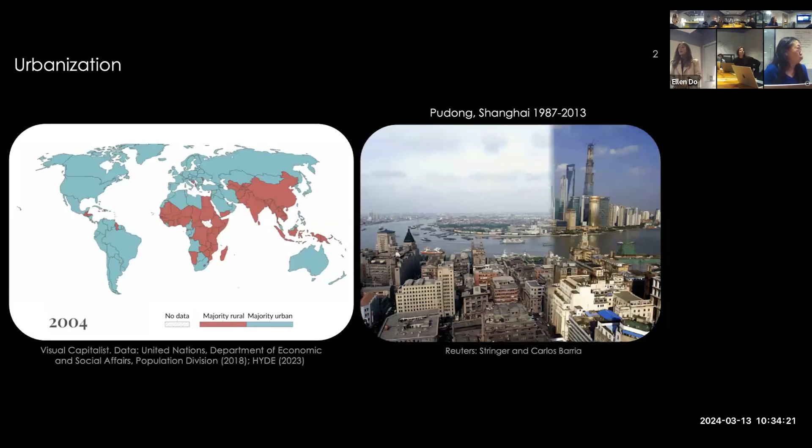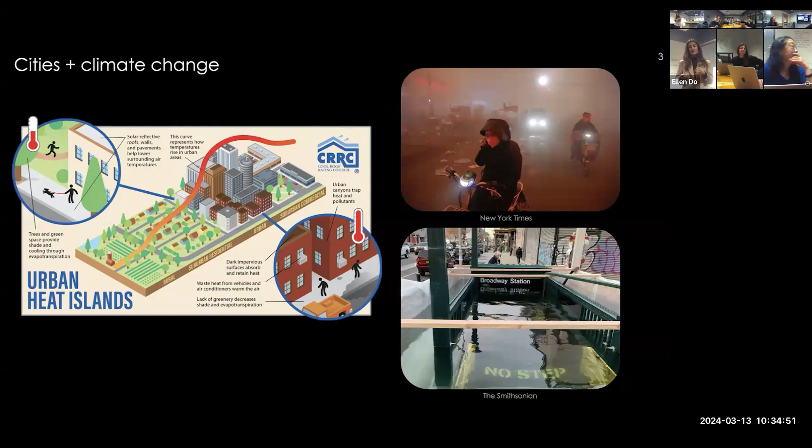This increasing urbanization is happening at the same time that we're feeling a lot of the effects of climate change. Temperatures are rising globally, but this effect is felt even more strongly in cities. This is the urban heat island effect, which is due to things like surface properties and the morphology of cities, which can trap heat and impede ventilation. We're seeing a rise of contaminants in cities now with increasing wildfires, as you're all well aware. Cities are, in general, not very well equipped to handle the impacts of rising extreme weather conditions.

This is because currently our cities are largely comprised of static structures that can't self-regulate. So we need a lot of interventions for things like cooling and heating. In the United States, buildings account for 39% of total energy consumption.

So if we want to think about designing new city spaces and adapting old ones so that they're more resilient to the effects of climate change and urbanization, it would be much better if we could design them to be more self-regulating and lifelike. One great way to do this is to quite literally reintroduce life back into the city in the form of vegetation. Green roofs and walls are a great way to reduce temperatures and improve air quality. However, due to either the integrity of older buildings or the local climate, a lot of spaces in cities are not amenable to this type of vegetative cover.

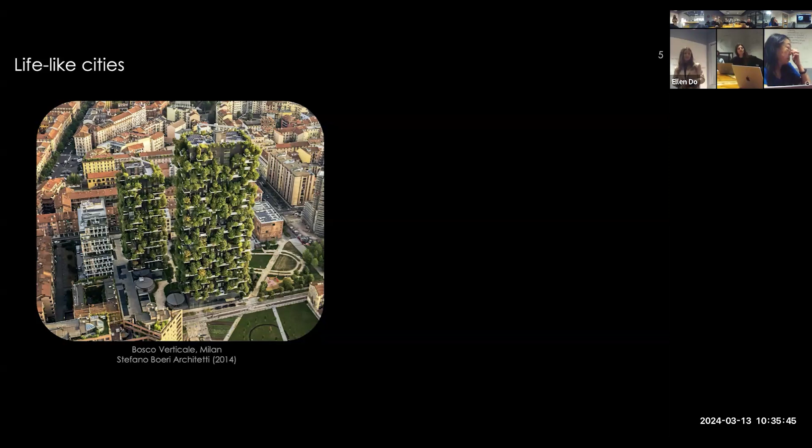So this is where engineered solutions come in, and in particular, adaptive architecture designs. This is a famous adaptive shading facade at the Arab World Institute in Paris. Each of these individual apertures of different sizes can open and close in response to a sunlight stimulus, and it's really effective at reducing the need for cooling intervention in this building. But as you can see here, the mechanism is rigid body motions of slender structures that require a lot of electronic actuation, and there are a lot of moving parts here. This facade was famously frozen in place and then under repair for years.

So if we want to think about building on and maybe improving upon these types of designs, my suggestion would be that we step away from these rigid body motions that require complicated input to move, and instead turn toward shape-shifting structures that are relatively happy to deform in large nonlinear ways.

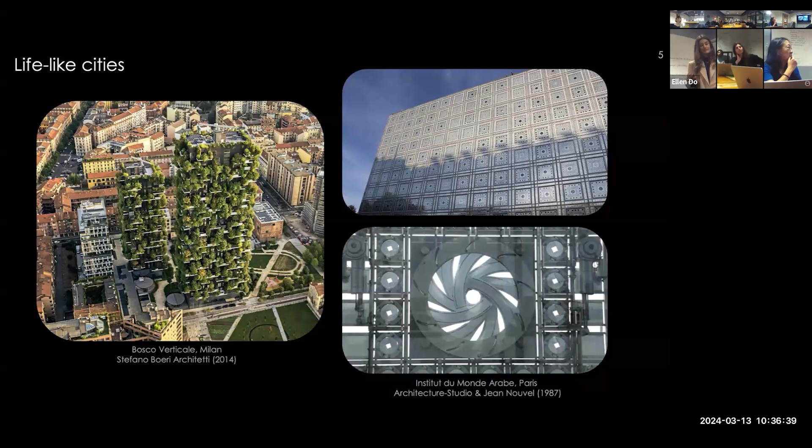So what do I mean by that? Well, when a structure is forced to deform, it will do so in a way that minimizes its total potential energy V, which for elastic bodies consists of the elastic strain energy U and the potential P from external loads.

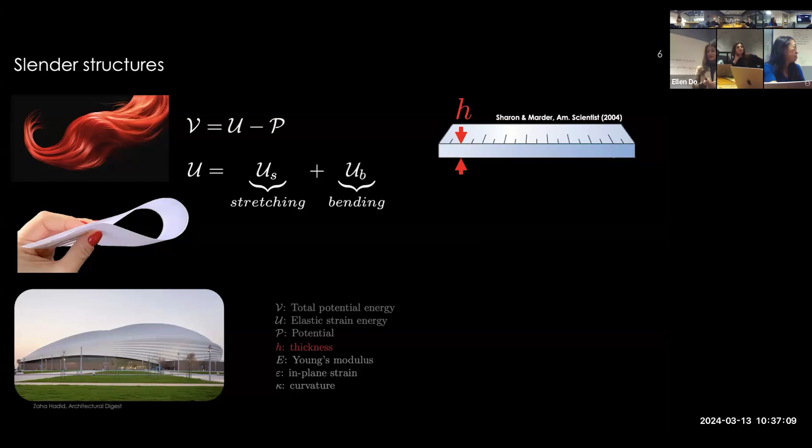For slender structures like rods, plates, and shells, for which the thickness H is much smaller than at least one of the other dimensions, in general we can write the elastic strain energy as a sum of two terms: one that penalizes deformations due to stretching or compression, and one that penalizes bending deformations. The stretching energy scales with the thickness H, whereas the bending energy scales with the thickness cubed. So you can imagine, if this thickness H gets smaller and smaller, it becomes much cheaper energetically to bend than it is to stretch. The result is that slender structures will undergo wildly nonlinear deformations in order to avoid stretching whenever possible.

Sometimes these nonlinear deformations can come on suddenly or even unexpectedly, and this is known as an instability. There are two main types of elastic instabilities.

The first is buckling, and the canonical example is a column under a compressive load. If I start to increase the load on this column, it will reach a critical point where the load path becomes unstable and the structure will deflect in one direction or the other. This is a bifurcation instability.

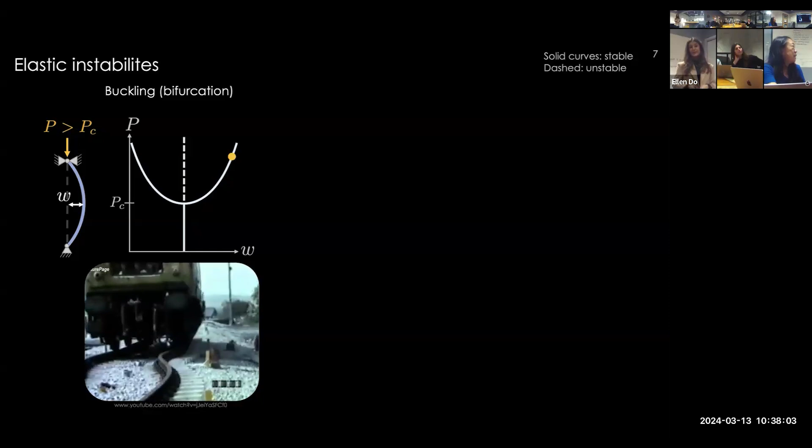An example is railroad tracks, which can swell due to thermal expansion from the sun. This causes a compressive stress to develop, and buckling can occur in kind of catastrophic ways.

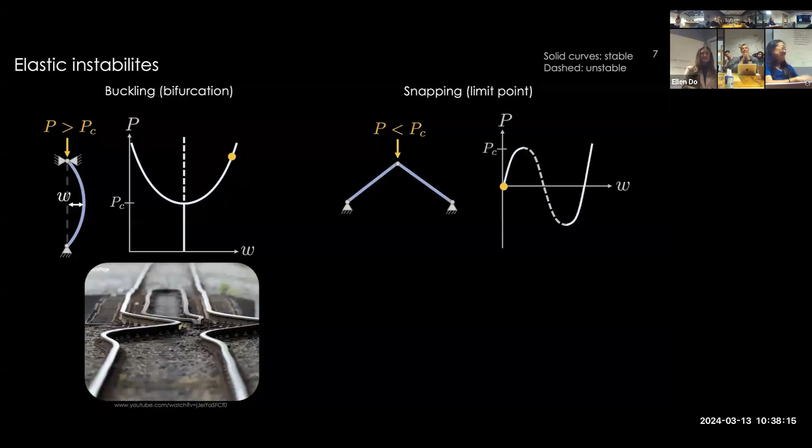Snapping is the other main type of elastic instability, and the example here is of a truss, which is loaded at its center. As I increase the load, it reaches a critical point where the load path is unstable, and the nearest stable point on this load path is quite far away in terms of the deflection W. So the structure will rapidly snap through to its inverted state.

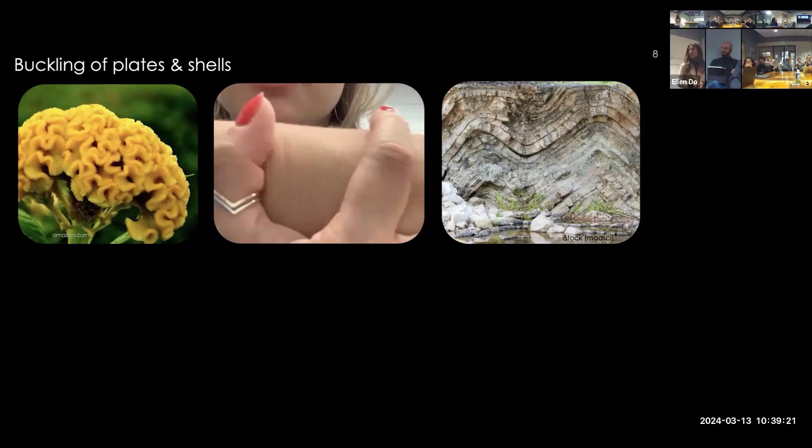Wrinkling is also a buckling instability that emerges due to compression while being confined to a soft substrate. Many of the morphologies in Earth's crust can also initiate from buckling instabilities. Generally speaking, these deformations and instabilities are highly sensitive to geometry, material properties, and boundary conditions.

The point here is that if we as engineers can understand and control these types of instabilities, then we probably have access to a wide range of morphologies for our shape-shifting engineering designs. People have been doing this for the past couple decades, across scales and for different applications, including some of you here.

To give you some examples, at the micro scale, buckling can give functionality to stretchable electronics, and buckling of these spherical micro swimmers is what gives them their mobility.

At the centimeter scale, snap-through instability of this spherical cap actuator in the cartoon here drives this soft robotic gripper.

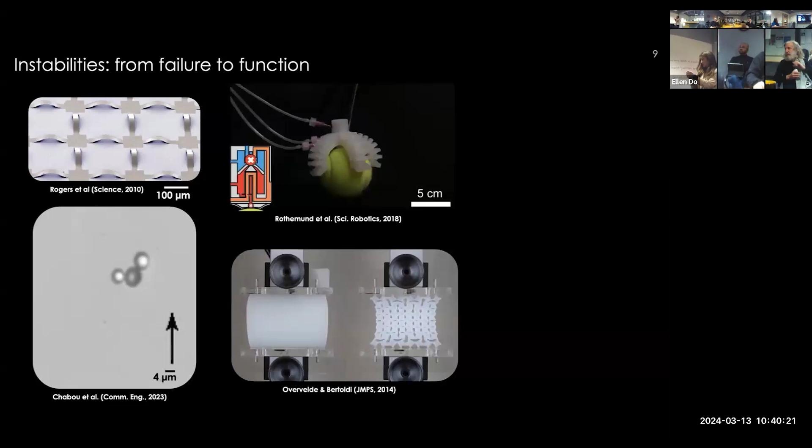A subfield that's blossomed in recent years is that of mechanical metamaterials. The idea is to design the geometry of the structures so that buckling instabilities will give the structure some emergent behavior, such as a negative Poisson's ratio, as you're seeing here.

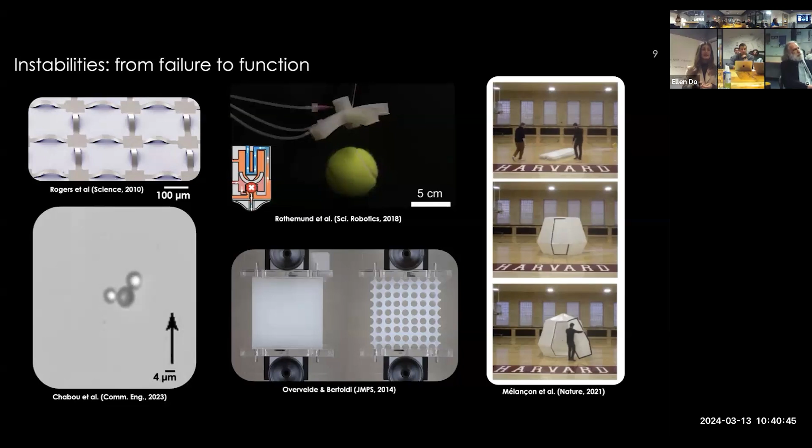Also at the meter scale, local snap-through instabilities aid in the deployment of this origami shelter. I'm showing a notable example here at the meter scale, but really, the vast majority of research on using elastic instabilities in engineering designs has been at the centimeter scale and below. This isn't to say that a lot of these deformations aren't scalable.

There have been some examples in architecture of using these kinds of large deformations and instabilities in designs. In this building facade, large bending of these panels gives the adaptive shading functionality.

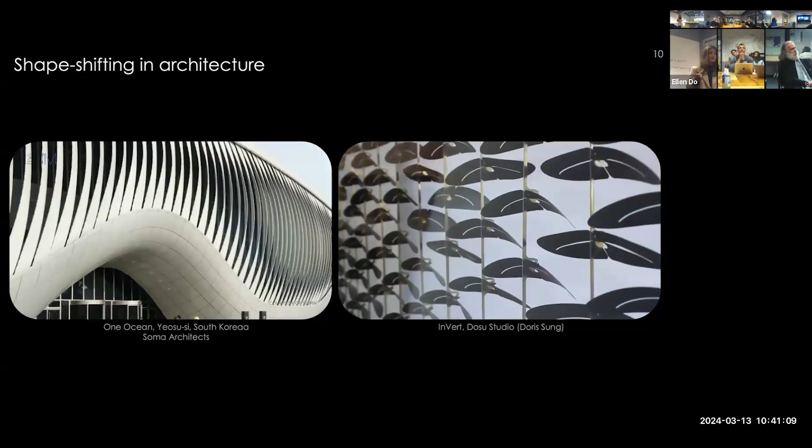In this example, each of these cylindrical shells is made of thermal bimetal. Past a given temperature threshold, they snap through, changing the lighting and thermal environment within this model room.

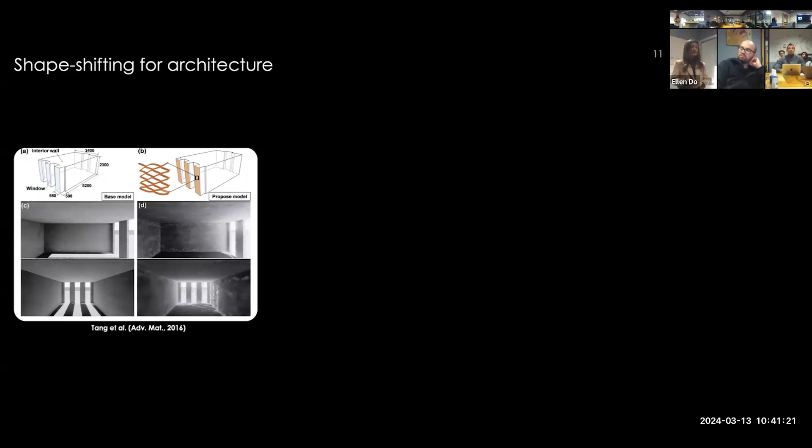The mechanics community is also starting to get on board here. In particular, in the past several years, there have been several examples demonstrating how we might be able to use kirigami for adaptive shading facades.

But ultimately, this subfield is really just getting started. In my opinion, there's a huge amount of untapped potential to connect this wealth of knowledge we have at the centimeter scale about the mechanics of shapeshifting with the need for architectural scale solutions for not only shading, but also things like regulating airflow, sound, water, you name it.

This is the overarching goal of my research, that is to understand and apply the mechanics of shapeshifting, which is to say, compelling structures to adopt a different configuration on demand or in response to a stimulus, to develop adaptive designs for flexible, sustainable, and resilient urban spaces.

My work in this area spans from fundamental questions, like can we understand these deformations, instabilities, and shapeshifting, to more applied architectural applications. I'll bounce between those ingredients in this talk.

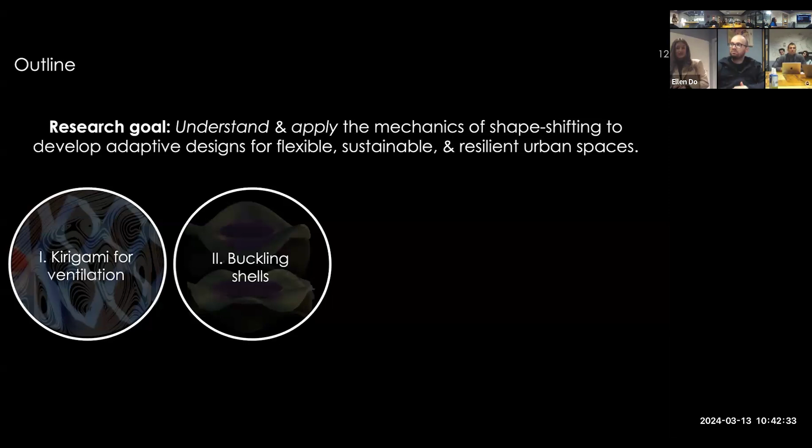I'll talk first about using kirigami for ventilation. Then about a fundamental topic: how shell structures buckle in response to confinement. Then about confined plates at the intersection of art and architecture. Finally, I'll discuss future work on lifelike cities based on shapeshifting and surrounding physics.

I'll start by talking about using kirigami for ventilation. As mentioned in the introduction, cities, because of their morphology, are often prone to poor ventilation patterns, especially in the urban canyon—the space between rows of buildings.

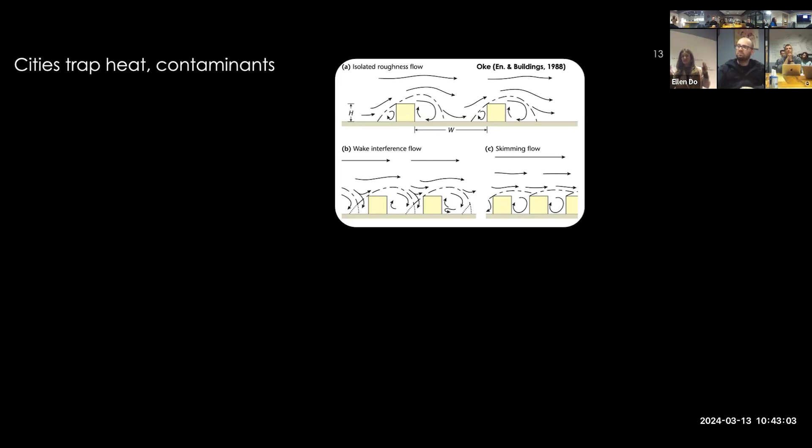Retrofitting structures that pop up within urban canyons, like streeteries, parklets, or canopies over the canyon, common in southern Spain, serve a purpose by providing shelter or shade, but they can also exacerbate ventilation problems.

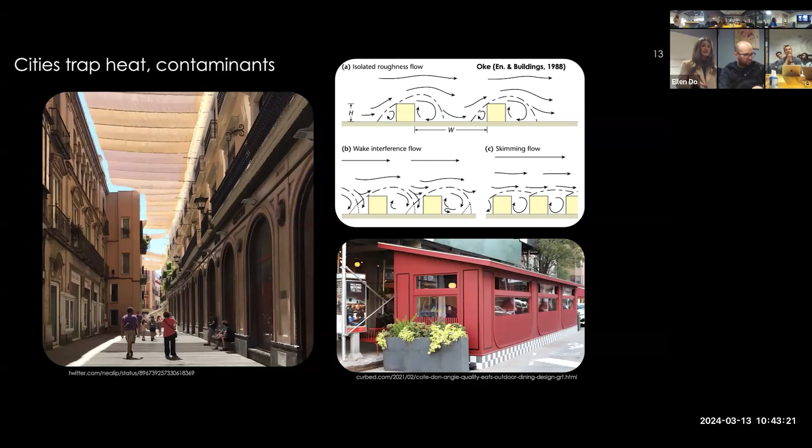Our goal with this work was to redesign these retrofitting structures so they can not only provide shade, but also improve ventilation of a space beyond what it would be in the absence of shade. Our approach is based on kirigami, or cutting paper.

I've added a pattern of linear parallel cuts to this sheet, and when I stretch it uniaxially, the unit cells I've created buckle out of plane and rotate. Our hope is that those angled chutes will steer wind into spaces with stagnant air to ventilate them.

From the perspective of adaptive architecture, kirigami has many potential benefits: it's easy to make and customize, it's waste-free, it's flat-packing, and it can be actuated with uniaxial stretching—a single degree of freedom actuation.

The mechanics of kirigami are very well studied, so I have a library of literature telling me how changing the cut pattern changes the resulting deformations and mechanical behavior of these structures. So for ventilation, my job is really to focus on the fluid mechanics side, where much less is known.

The interaction between kirigami and a fluid is quite complex. But we think the most important feature for ventilation is these angled chutes, so I approximate this as a quasi-2D approximation using angled slats or louvers.

In this study we took this simple geometry to quickly vary it and find design guidelines to inform our kirigami designs. I'll talk briefly about our results with the louver approximation, then bring it back to kirigami and see how we did with these ventilation designs.

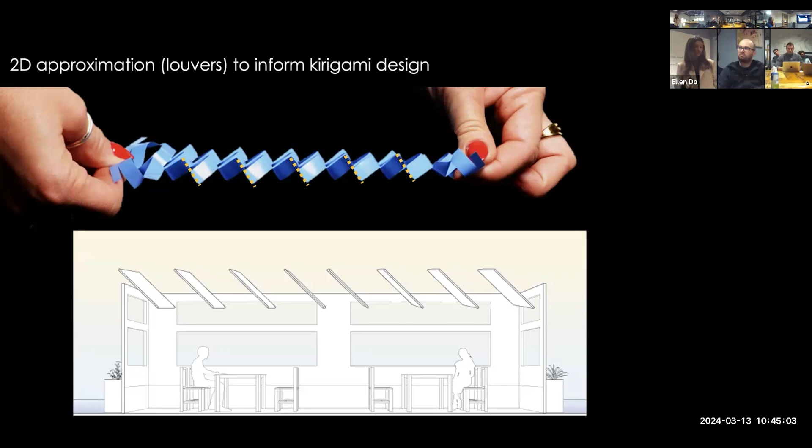I study this primarily with experiments and simulations. We first asked how these angled features interact with oncoming wind to ventilate a standalone enclosed space, shown here as a shallow box.

I perform experiments in a wind tunnel, with oncoming wind ranging from 3.5 to 25 meters per second, corresponding to a Reynolds number on the order of 10^4 or 10^5. This dimensionless number must be kept roughly constant so that what I learn from this scaled-down model applies to realistic urban flows.

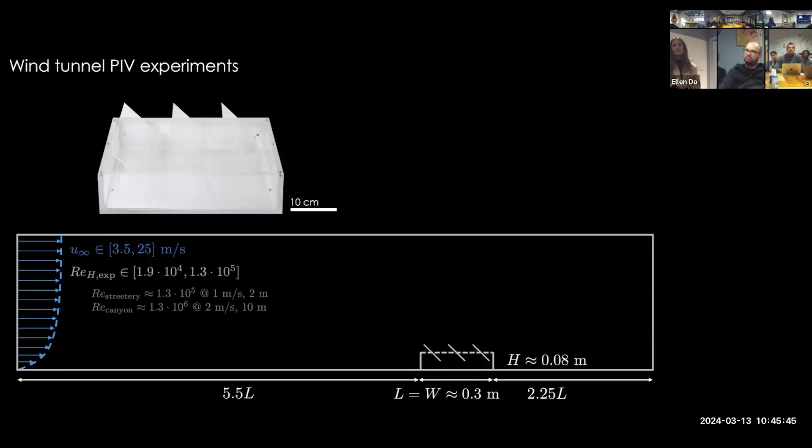This corresponds well to what we'd expect for a typical streetery or parklet, about one order of magnitude below what we'd see in a typical urban canyon.

I perform particle image velocimetry, or PIV, measurements by seeding the flow with aerosolized oil particles, illuminating them with a laser, and taking high-speed images. This gives images of particle motion from which we reconstruct a velocity field. At each camera position, I take 2,000 pairs of images at 25 hertz, totaling 80 seconds of data.

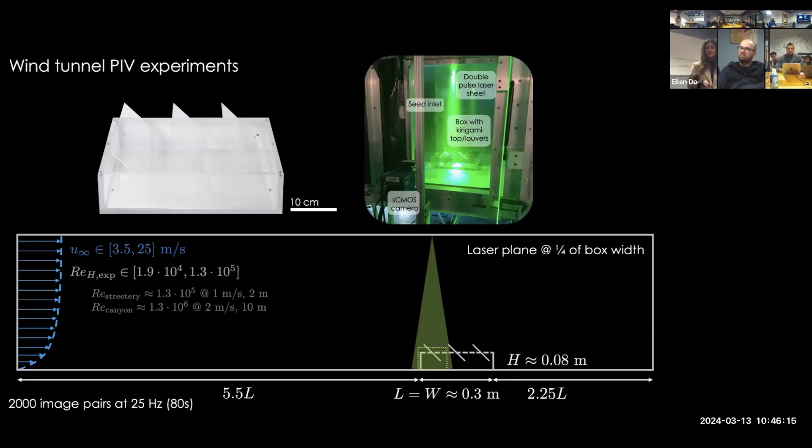And to construct the full plane of this box, I'm taking data at 4 different camera positions. I also did computational fluid dynamics, or large eddy simulations, on this system. Large eddy simulations strike a good balance between resolving turbulence and computational efficiency. I used ANSYS Fluent with standard LES solver settings.

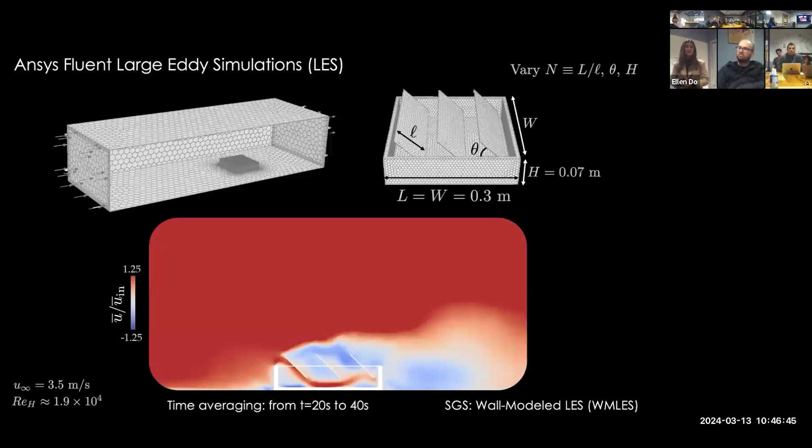The domain mimics that of the wind tunnel, and a typical simulation can look something like this. The time average data from simulations is taken over a course of 20 seconds, starting at t equals 20 seconds.

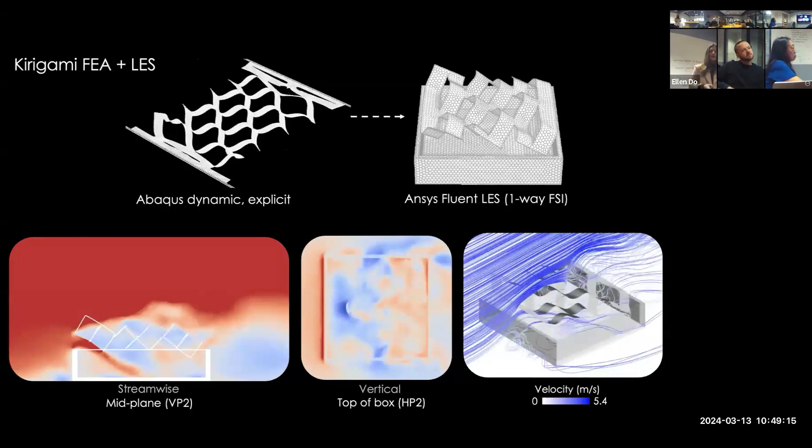I'm treating the kirigami as rigid here, so this is a one-way fluid structure interaction in the simulation. When I do that, we can start to take a look at how kirigami interacts with the flows in different planes, and then we can also look at this time average data here.

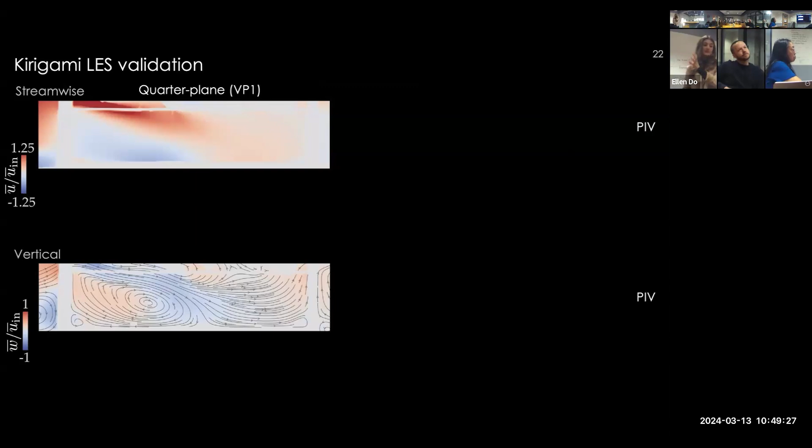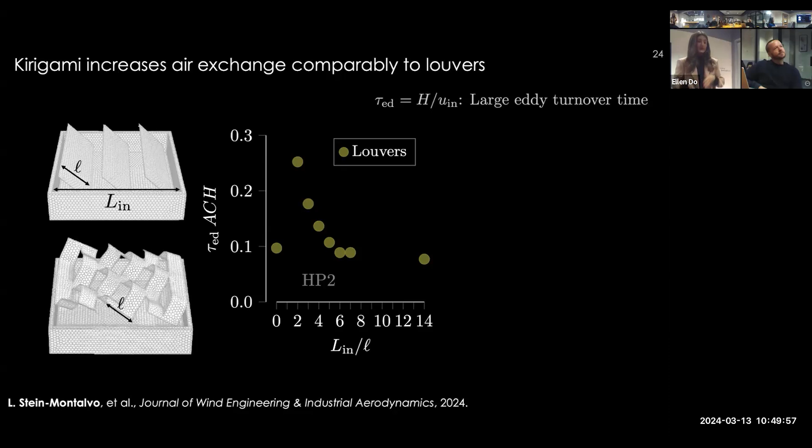So then we can come back and quantify this. This is the same data you've seen for the air exchange rate for louvers; I'm just normalizing the y-axis by essentially the inflow velocity here. Then we can add our kirigami data point, and we see that, first and foremost, we increase the air exchange rate above that for the open box, which was the goal.

We're also seeing that this data point falls really quite in line with the data for this simplified geometry, telling us that this significant geometric simplification was probably a good informative one for this type of design. And there's certainly room for optimization here.

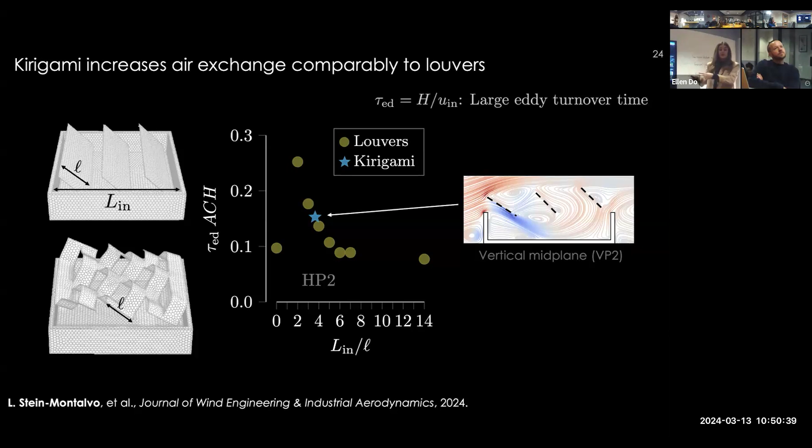One thing that might be kind of unsatisfying so far is that it looks like this most upstream unit cell is really doing most of the work in guiding ventilation. And in this paper, we quantified that in two different ways, and this is the case. So if those downstream units aren't really doing much to help ventilation, we might be able to put them to better use.

Similarly, it might not be shocking to learn that changing the angle of orientation changes the air exchange rate. So for example, if you had uncomfortably high wind speeds, you could close them off to reduce that. And with kirigami, this is certainly tunable in situ with this uniaxial stretching.

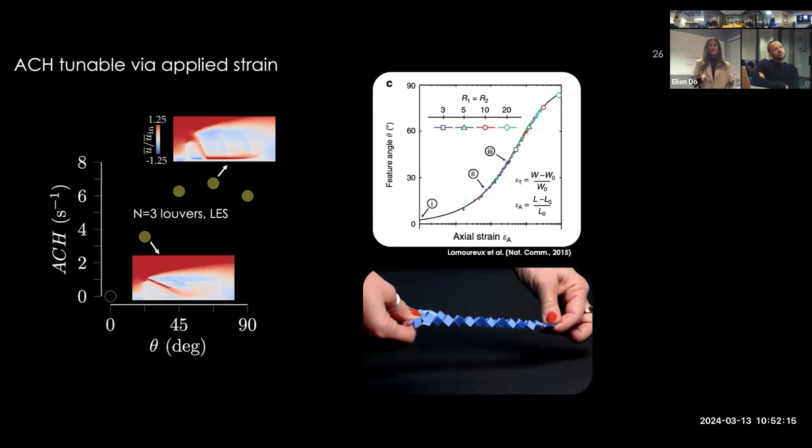This video plays, yeah. Again, this is documented in the literature, how the axial strain, the stretching, compares to the feature angle. So these kinds of actuation ideas are things that I'm thinking about going forward. How can we achieve these things in real structures?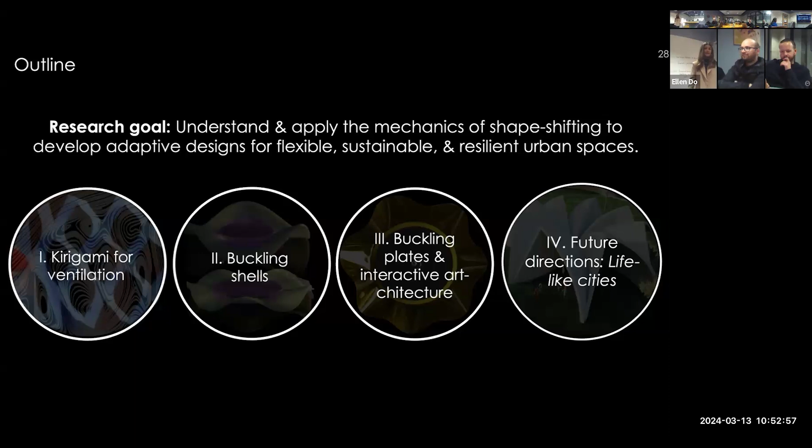So I'm going to shift gears here. But before I do, I want to reemphasize that in this first project, I really focused on the fluid mechanics side of things because the mechanics of shape-shifting of kirigami were very well documented and studied in the literature. But for other kinds of designs that we might want to do with shape-shifting structures, this is not the case, and we need to do a little work to understand the fundamentals. So I'm going to shift gears to talk about one such system.

Shell structures are abundant in nature and oftentimes are confined in some way by their environment. I think that confinement of shell structures will be useful for designing robust adaptive facades, and I'll come back to this when I talk about future work. But at this point, the confinement response of shell structures, which are curved, is not very well understood in the literature, with the exception of specific cases like the indentation response of positively curved shells.

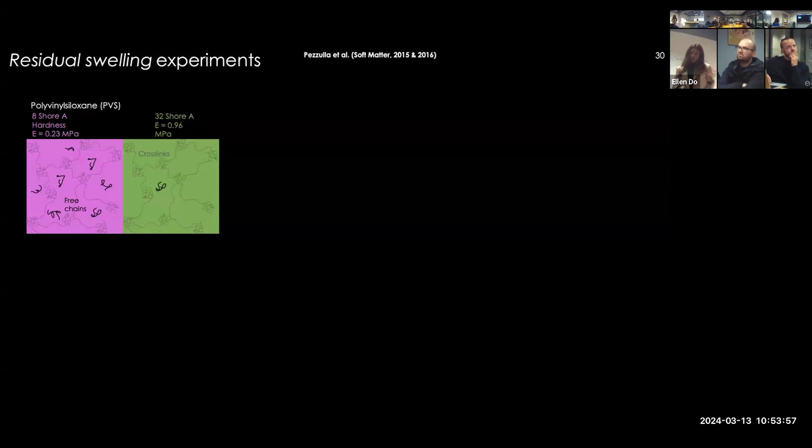So we wanted to take this kind of broad sweeping approach and ask how shell structures that vary in their geometries respond to confinement. To do this, I use primarily experiments, and I used a technique called residual swelling.

So we take these two polymers, which have different hardness ratings and different concentrations of free chains. I cure them one by one in contact with one another. And when I do so, there's this concentration gradient of free chains. So in a diffusive-like process, those excess free chains will migrate from the pink polymer into the green one. That causes a loss of mass to the pink polymer and an increase of mass to the green one. This leads to a geometric incompatibility, which causes these structures to develop a natural curvature.

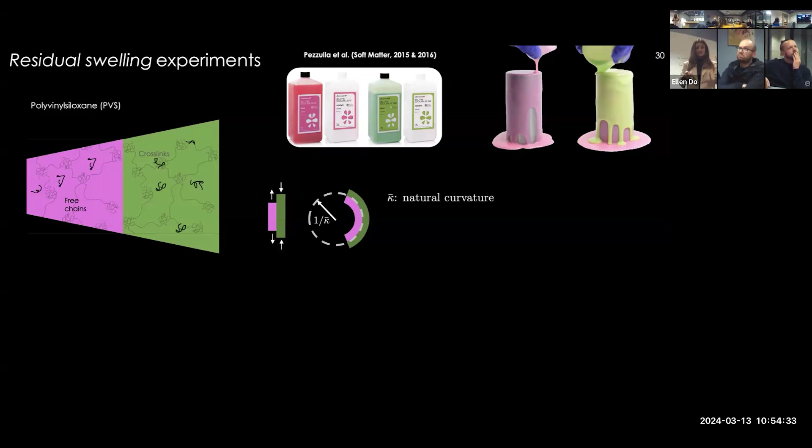I can arrange the different polymers and molds in different ways to create a variety of shells. I studied four types of shell geometries: saddles, rolled sheets, cylinders, and spherical segments. In this initial unconfined state, each of these structures has two lobes.

What I'm going to do is add confinement. I clamp the top two shells in their central region between two acrylic plates, and on the bottom, I'm clamping them at their base. When I do that, we see buckling into an additional higher mode number.

I'll define a few geometric parameters here. The overall radius of the shell is big R, and the free length—the distance from the clamp to the edge of the shell—is little r, which for saddles and sheets is that distance you're seeing, and for cylinders and spheres is essentially the height.

Now, if I progressively decrease this free length r, what we see is buckling into higher and higher mode numbers. I have these shells that vary widely in their average Gaussian and mean curvatures. The geometries are very different, but we're seeing this global behavior among all of them that's really quite similar.

So we wanted to understand what's underlying that. Can we reduce it to its simple physics and geometry?

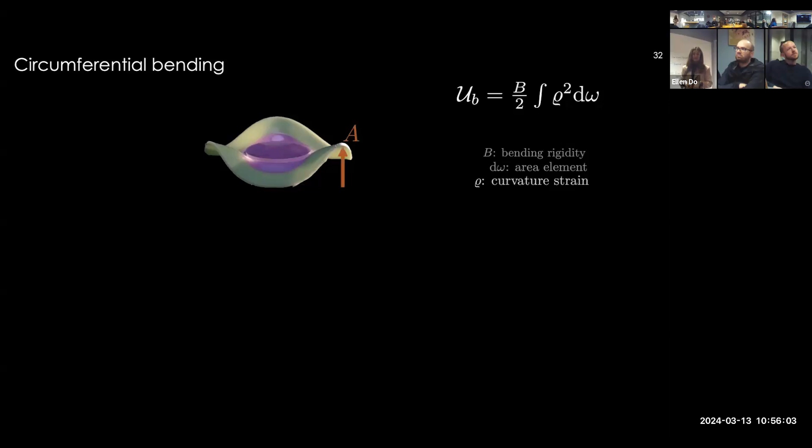To do that, we can come back to this elastic energy, which all of these structures are trying to minimize. We can say that one main contribution is definitely going to be bending in the circumferential direction. I can approximate the curvature in the circumferential direction as shown.

If I just unwrap the edge of this shell, this is what it looks like. To compute a bending strain, I need to compare that to its reference state, which looks like this. Then I can plug this into the elastic energy using some geometric identities, and write an expression for the elastic energy from bending in the circumferential direction.

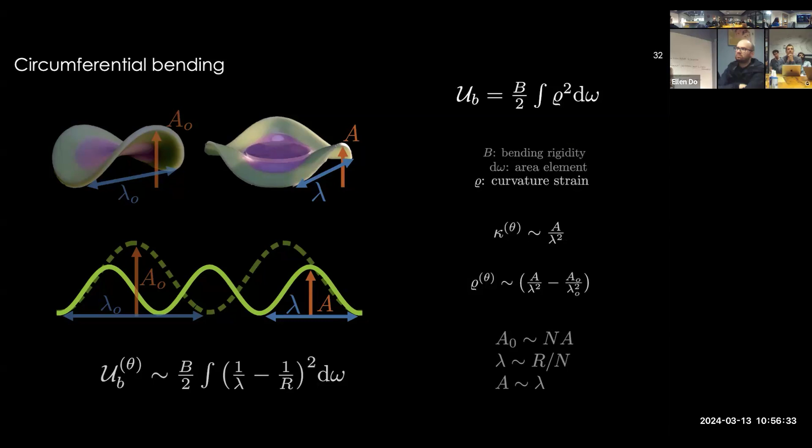The takeaway here is that from the perspective of the circumferential direction bending energy, it wants to preserve these long wavelengths, which means it wants a low mode number. Something's clearly opposing that because we're seeing higher mode numbers.

What we think that is, is bending in the radial direction. I can do a similar thing here—it's loading again, but I'll write an expression for the curvature in the radial direction and compare that to the reference state, and plug this into a radial direction bending energy term.

The takeaway here is that from the perspective of the radial direction bending energy, the structure wants to preserve this ratio. So if this free length r gets smaller, it wants a lower amplitude, which means it wants a higher mode number. So we think these are the two competing ingredients here.

So I can carry out an energy balance, which means I'm going to equate these terms, equivalent to minimizing this elastic energy. When I do, I come up with a scaling for how the mode number should depend on this geometric parameter, which is the ratio of the overall size of the shell to the free length. I'll call this geometric parameter L.

Before I plot this against our data, I'll recover some prefactors here based on the minimum value of L. For saddles and rolled sheets, that prefactor is different than it is for cylinders and spheres. So I'm going to plot these things differently on the next slide.

What we see is that this single geometric parameter seems pretty well able to capture this global behavior across this wide range of shell geometries. I'll also point out these are linear axes, not log-log, so we're seeing a pretty good linear trend here. Furthermore, there doesn't appear to be a big dependence on thickness in setting the mode number over the range of shells we studied.

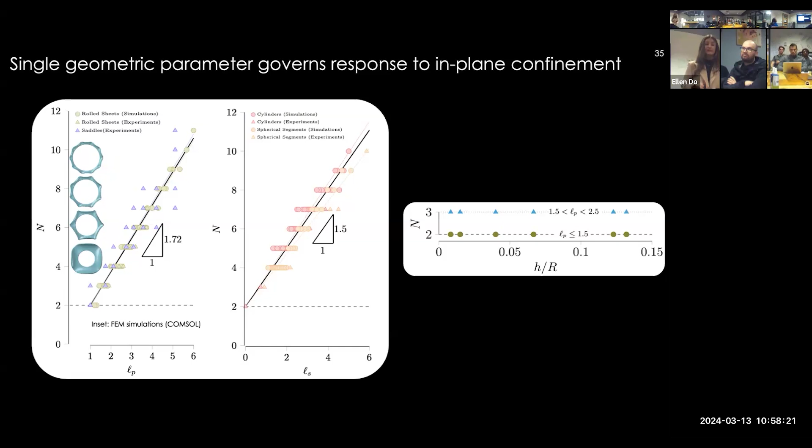This tells us that we were probably okay in neglecting the stretching energy in this energy balance. So we have this understanding of how geometry governs the response to in-plane confinement. We then went on to ask what happens if we vary the transverse confinement.

When I release some of this transverse confinement, the buckling mode decreases progressively, and vice versa—if I increase the confinement, the buckling mode increases. So in this paper, we studied the force response, and we also modified this scaling to account for this transverse confinement as well, in a kind of quasi-empirical way.

So we come away with this good understanding of how geometry governs the response to in-plane and transverse confinement for a wide range of shells. And by reducing this to geometry, it means that the things we learn can apply to different materials and stimuli, and thus can be used for a range of applications.

I'm going to come back when I talk about my future work and talk about one application I'd like to go forward and study. Before I do, I'll talk about another kind of confinement problem on the fundamental side. And then if you bear with me, I'll talk about how we're using it at the intersection between art and architecture.

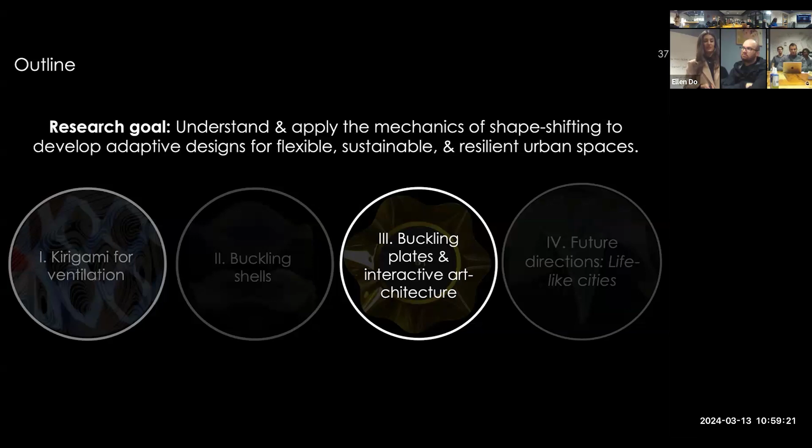Compared to the confinement response of shells, which are curved, the confinement response of thin sheets has been really well studied. We have an intricate understanding of how intrinsically flat thin sheets respond to confinement. Under relatively weak confinement, the energetically preferable deformation response is to wrinkle, distributing stretching and bending across the whole structure. However, under stronger confinement, it becomes energetically preferable to stretch and bend a lot, but only in small sacrificial regions: stretching ridges and vertices.

We can take a close look at the structure of one of these vertices by taking a piece of paper, placing it on top of a ring or your coffee cup, and indenting it at its center. This buckled structure that forms is the developable cone, or D-cone. All of these radial generators remain unbent, or developable to a flat sheet, which means no stretching has occurred in the bulk of the structure. Instead, all of this energetically costly stretching has been focused into this core region.

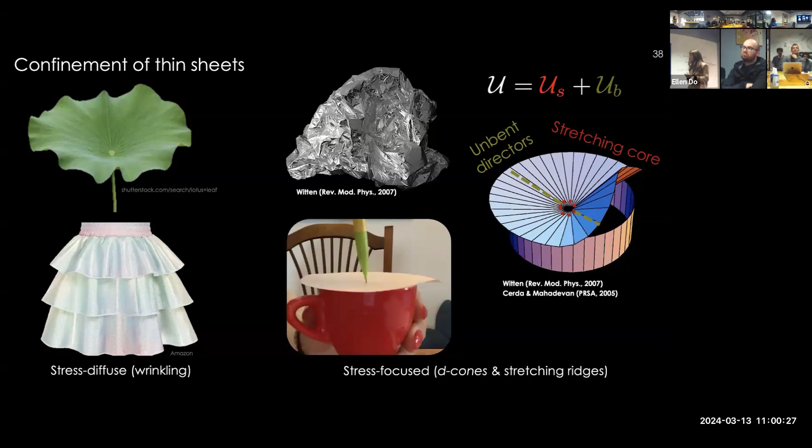The D-cone has been really well studied, especially from a theoretical perspective, and it's understood in particular that the size of this dislocated buckled region is independent of materials and geometry in an idealized system. But we thought there's probably a lot going on away from these idealized limits, and we wanted to understand what happens in the middle, or in the question mark stage. In particular, we wanted to reduce this again to the role of geometry, for the same reasons as in the past study.

So to do this, we perturb this ideal D-cone structure by once again clamping its central region. Where it wants to focus all of its stretching and bending, it can no longer do so, and instead it takes on this circumferential buckling pattern. To study this systematically, I'll define three geometric parameters: the radius of the clamp RC, the radius of the ring RR, and the radius of the plate RP.

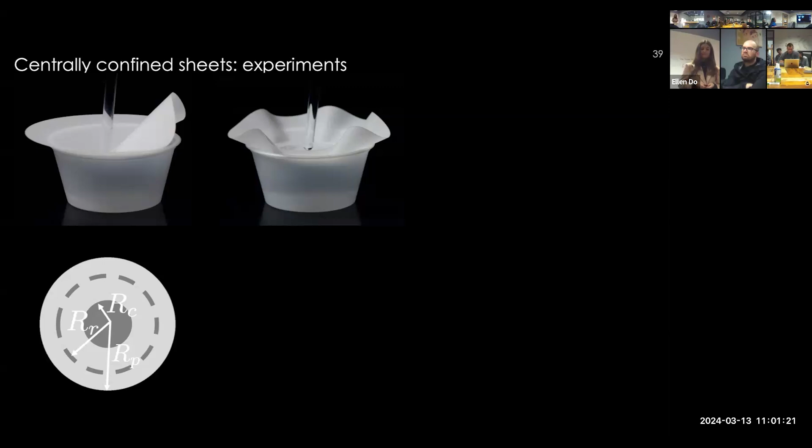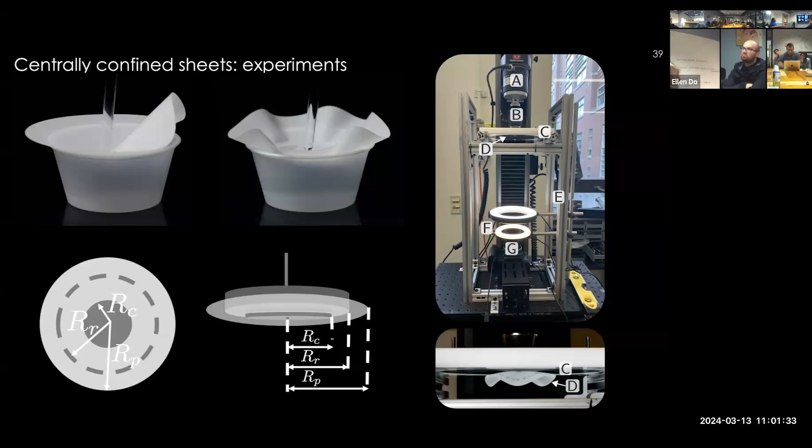I study this with experiments using an Instron machine, which means I can impose displacement and measure force. Initially this clamped plate assembly rests underneath the ring. I pull it upward quasi-statically a distance d, and we watch from below with an upward-facing camera as it deforms. I'll define a dimensionless packing parameter, epsilon, which is d over the length RR minus RC.

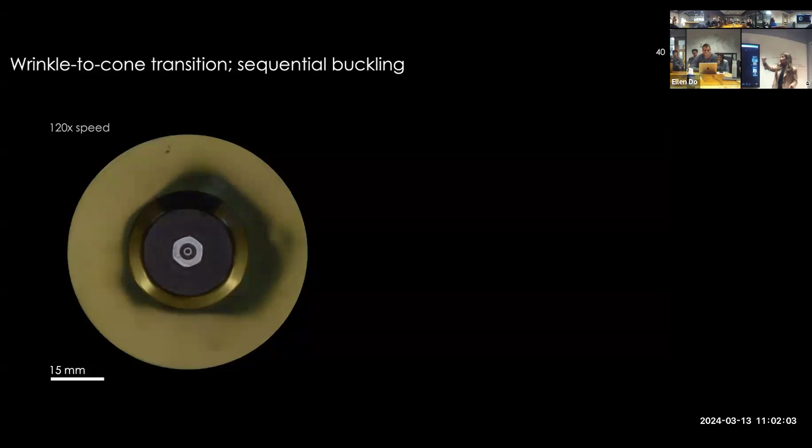When I do this, we observe a rich series of deformation sequences that was a little surprising to us in some ways. In this video, I'm pulling from behind the screen through a ring, this clamped sheet. What we see is that at small epsilon, at early deformation stages, there's subtle low-amplitude wrinkling in just the outer region of the sheet—this is a stress-diffuse deformation. Then we see a sudden transition to stress focusing when truncated cones form sequentially.

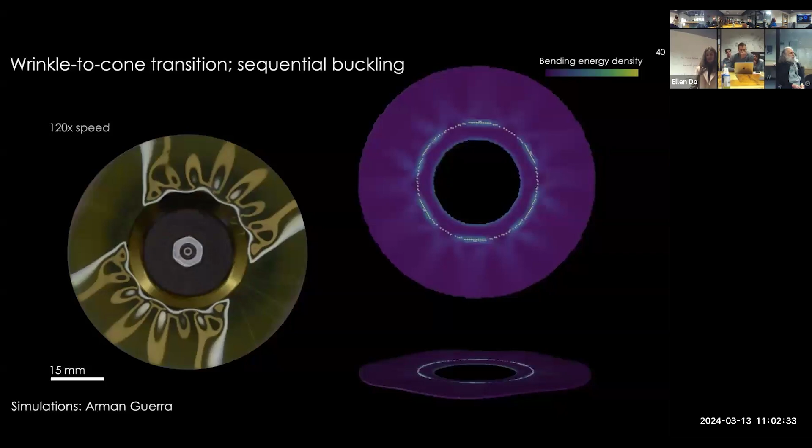I'll let this play again, and I'll also show you some molecular dynamics simulations from my collaborator, which are able to reproduce this sequence of deformations. The color bar here is the bending energy density, so you can start to see this focusing of all the energy into these regions near the clamp.

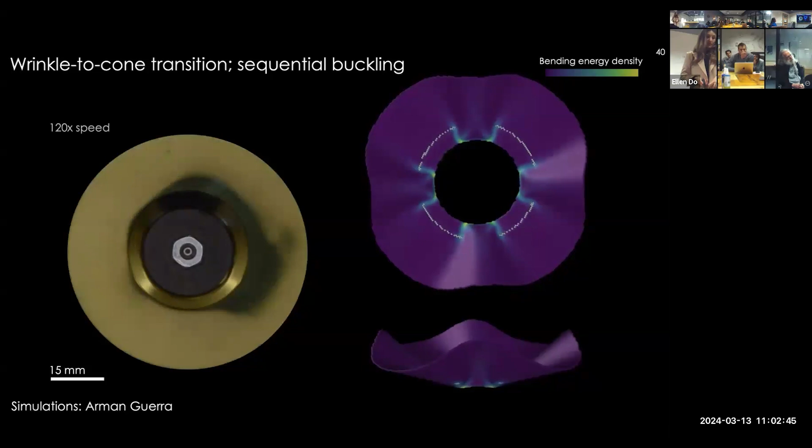Because these are performed on an Instron, I can also take a look at the force response here. When each new cone forms, there's a sharp drop in the force displacement curve. The images you're seeing popping up are 3D scans, so they're from experiments.

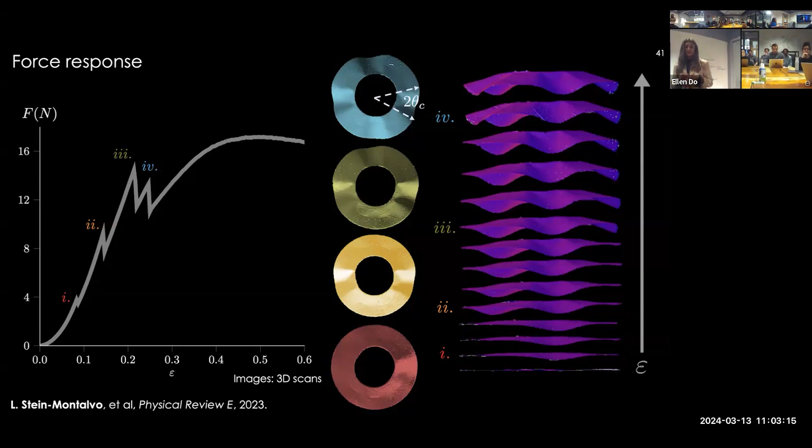In this paper, we study the force response in detail, but here I'm just going to focus on the geometry side of things, and in particular on the size of this dislocated region, which for the D cone is supposedly independent of geometry and materials. In our system, it looks like it's really sensitive to geometry. So we wanted to understand why and how our geometric parameters relate to this geometric outcome.

If I keep everything constant here, except I increase the size of this central constraint, we see buckling into higher mode numbers, and at the same time the size of this angular cone decreases. So I write this empirical scaling here. We observe over a wide enough range of our data the opposite dependence on the radius of the ring, RR. And so we have this empirical scaling.

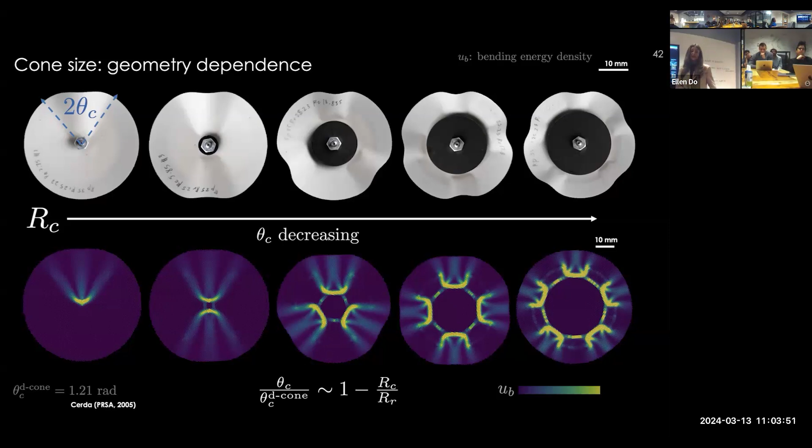I can check it against all of our data, and we see that this does okay. When you see the plot, you'll agree with me. Okay, so over here in this range where the radius of the clamp is comparable to the radius of the ring, there's good agreement with this scaling.

But as we get closer to this D cone limit where the clamp is really small, there's quite a lot of scatter. In fact, what we see is a diverging trend where in this D cone limit, the effect of the clamp is forgotten by the structure, and instead the overall radius of the sheet becomes more important. We also see this inversion in the role of the ring radius, RR.

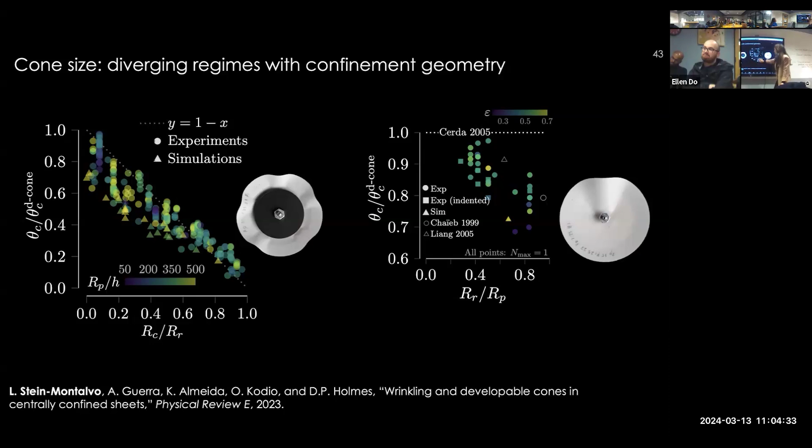I can summarize this in a piecewise empirical function, and I'll point out that this horizontal line is from the literature for the D cone that shouldn't depend on geometry. We're seeing that in our realistic sheets and also in data from the literature, there does appear to be a geometric dependence even in that limit. So we come away with this understanding, if empirical, about how geometry dictates these buckling patterns.

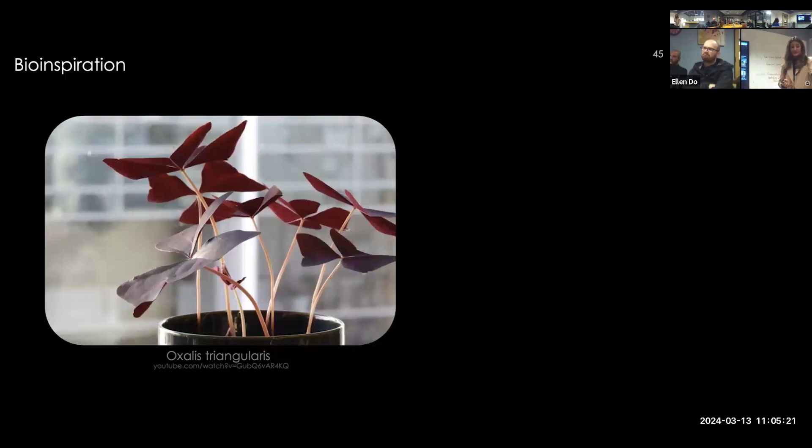We also understand the forces quite well. So I went on, and I was thinking these are lovely buckled shapes, kind of flowery and beautiful. And that got me thinking about other flowery or plant structures that can open and close in similar ways in response to, for example, sunlight or human interaction.

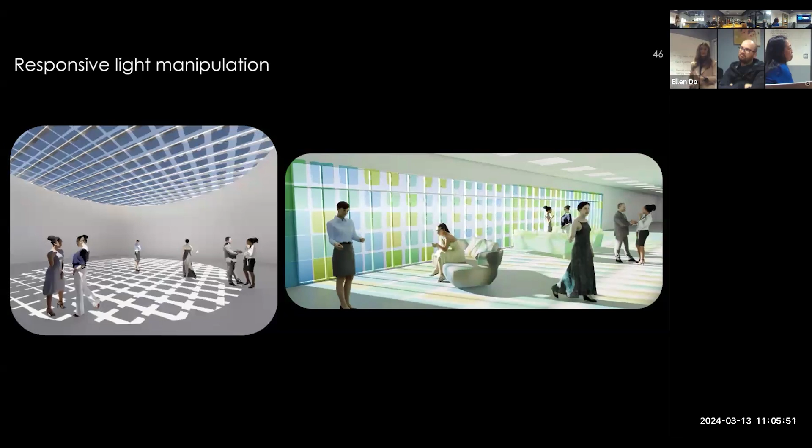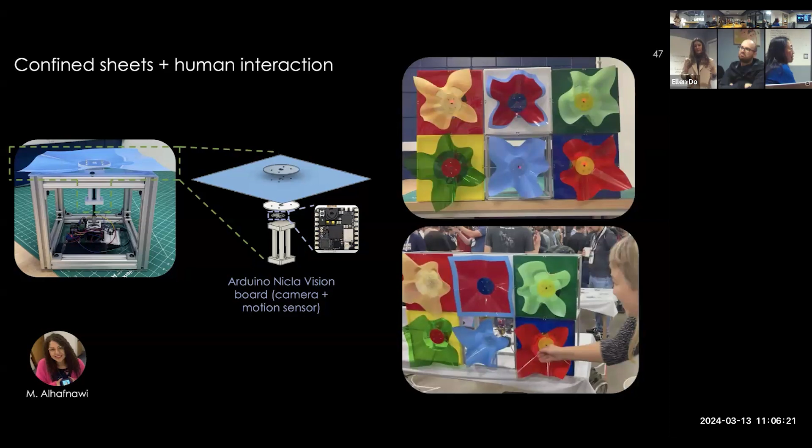We're building this up and putting together an exhibition, which will be on campus soon in April—an interactive art and architecture exhibition where people will be able to interact with these buckling structures. That's something I'm really looking forward to.

I'm going to talk about future work, but before I do, I'll give some big picture takeaways. Lifelike designs could make cities more resilient to the effects of climate change and urbanization. Understanding the mechanics of shapeshifting and other relevant physics like airflow can enable the design of environmentally regulating adaptive structures. Experiments, simulations, and simplified models can reveal generalizable and geometry-based design guidelines.

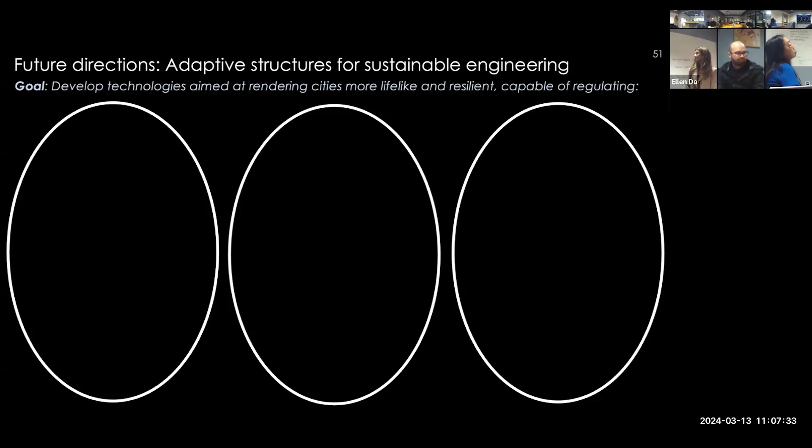The overarching goal of my future research program will be to design adaptive structures for sustainable engineering. In particular, our goal for the first 5 to 10 years would be to develop technologies aimed at rendering cities more lifelike and resilient, so that they're capable of regulating things like airflow, light, temperature, water, sound, and energy.

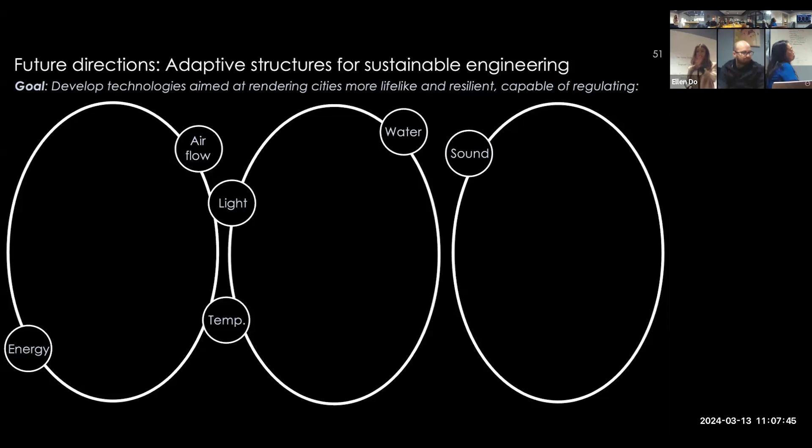So I'll dig into a little bit three project areas that I'm interested in working on. The first is tailoring urban airflow with mechanical metamaterials, not just to improve ventilation, as I've talked about so far, but also for comfort on the other side of things when you want to reduce wind speeds. Second is to develop robust, adaptive, and cooling building skin elements. And the third is urban soundscape management based on curved creased origami.

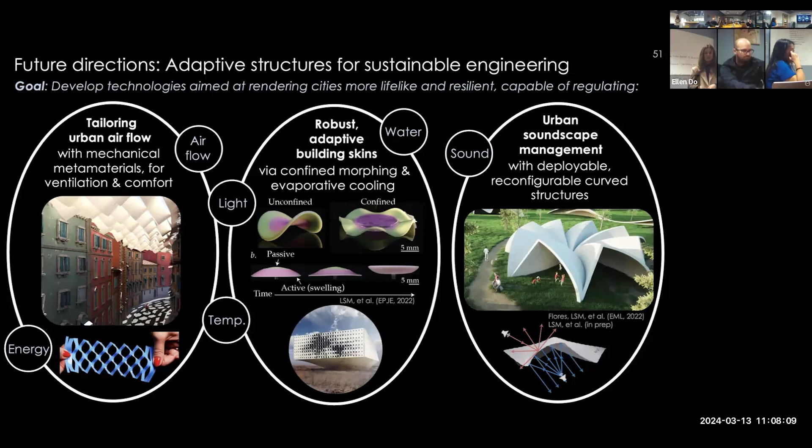So I'll start here. In the work I showed using kirigami for ventilation, I think there's still a lot of optimization to be done. We can play with non-homogeneous cut patterns, as well as upscaling and thinking about multi-physics - can we also play with sunlight and redirecting light, and solar energy harvesting, things like that. So I'm interested in continuing work on that project.

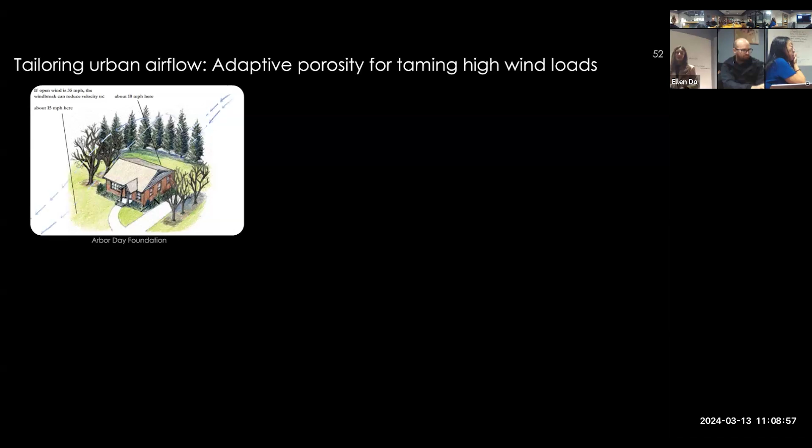I think we can take it a lot further. But on the other side of things, I think we've all been in spaces and cities where you're in a wind tunnel, there's this channeling flow, and it becomes really uncomfortable or even dangerous. So there are certainly other spaces in cities where we want to tame these kinds of flows. Trees and specific kinds of trees are great at doing this, but in spaces where we can't just plant these kinds of trees, engineered solutions often look a little more like this - these kind of big, material intensive, quite permanent structures.

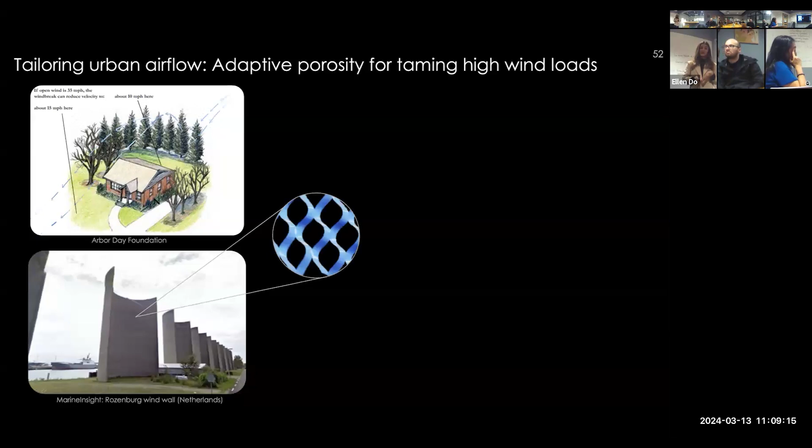So if we want to make this more adaptive and more tree-like, I think a nice approach would be redesigning these types of structures with mechanical metamaterials broadly defined - kirigami, origami, and textiles would be interesting to explore here. I know some of you are probably working on that or using textiles in general, so I think that would be a fun collaboration area. The goal here is to design these mechanical metamaterials so that when they're loaded by wind, the shape and porosity they take on is able to tame these wind loads and redirect wind in nice ways for us. We want to do this up to the meter scale.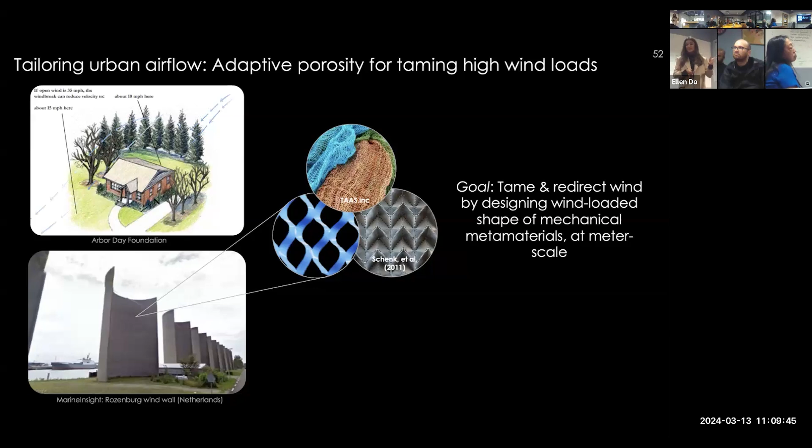The second area that I'm interested in working on is about building skin elements. So coming back to this idea of how can we improve on these types of designs and make them require less complicated input to move. Material science advances have gotten us a lot of the way. Really the goal is to achieve large, reversible, and fast deformations in these types of materials like thermobimetals, hygromorphic wood, shape memory alloys and polymers, and biocomposites.

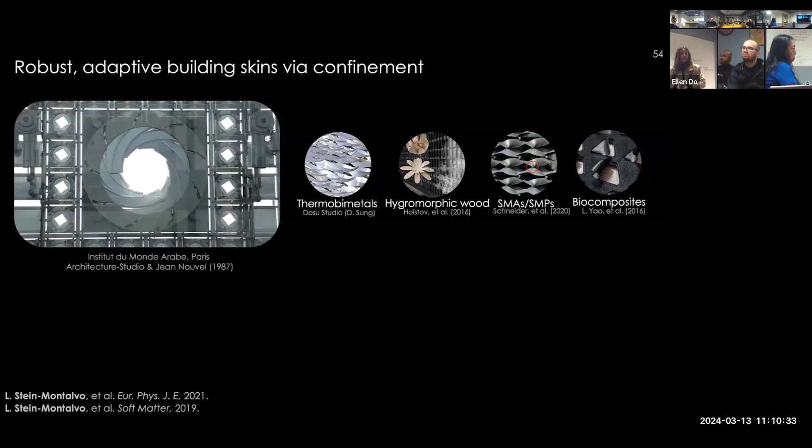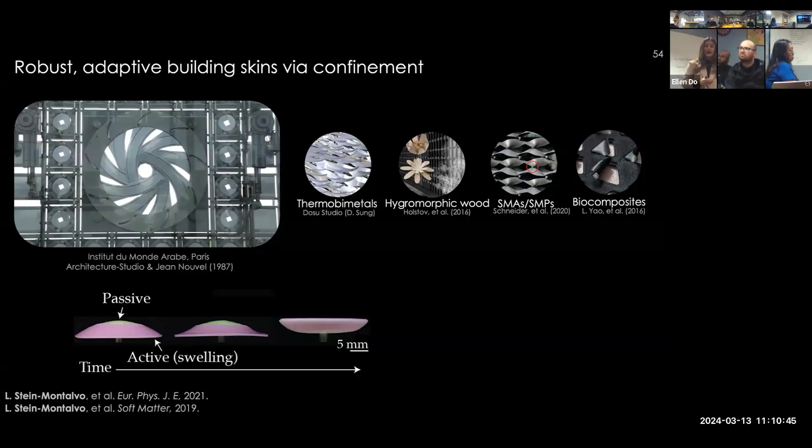This one responds to moisture. I think they get us a lot of the way there - we can have these large and reversible deformations, but the problem is that on architectural scale thicknesses, the deformations we would need are taking on the order of hours for a lot of these materials. So my dual approach to skirt some of these materials challenges using mechanics would be first to use these types of materials, but sparingly and in combination with passive elastic materials. Second, to use geometric confinement, which we've seen is very controllable through geometry and can lead to fast reversible shape change.

So I think using these kinds of techniques, we can play with, first of all, developing prototypical building skin elements that can regulate shading at the centimeter and then meter scale. A fun extension of this would be to play with retroreflective materials so that we're not only impacting inside the building, but also the surrounding environment. And also thinking about solar energy harvesting, so embedding PV panels, things like that.

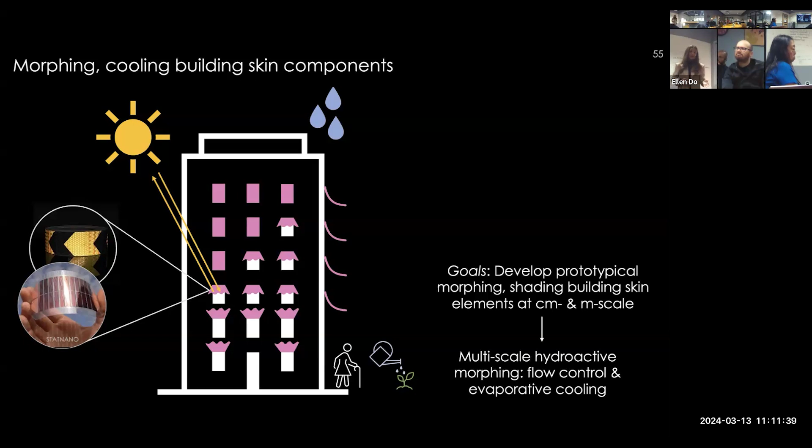If we can do this, I think we could take it a step further and think about hydroactive morphing - so responding to water, to rainwater or moisture in the environment. These panels could morph to provide things like shelter or redirect water for storage or irrigation. And I am also really excited about the idea of multi-scale morphing. So these are the large scale morphing ideas, but on the micro scale of these structures, we could also think about capturing water for evaporative cooling.

So in this sense, I think there's a lot of room to play also with materials. We could think about porous materials, not so much kitchen sponges, but porous mechanical metamaterials, kirigami, textiles, granular materials, and biomaterials or bio-inspired materials. These are the feathers of the sand grouse bird, and they use elastocapillarity to capture water droplets and carry them to their young. So I think there's a lot of room to play on the structural and material side of things here, and that's another area that I think collaborating with folks in Atlas would be really fun.

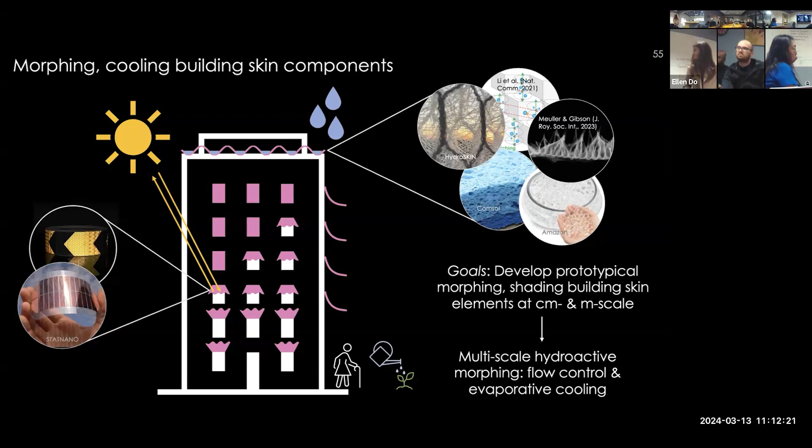And then the third area here is about urban soundscape management. The World Health Organization recognizes environmental noise as one of the top threats to human health, and it's also certainly a threat to biodiversity and ecology in cities.

The kind of sound barriers that we see nowadays are really large and very permanent structures, which means that for time varying or temporary noise sources, we don't really have many solutions right now. So the solution I propose is based on curved crease origami.

With traditional origami with straight creases, folding doesn't cause panels to bend, the panels remain unbent. When creases are curved, folding leads to panel bending. And we've shown in these works that this is really quite controllable through the crease curvature and through loading. So the idea is to play with this panel curvature and the interaction with sound waves.

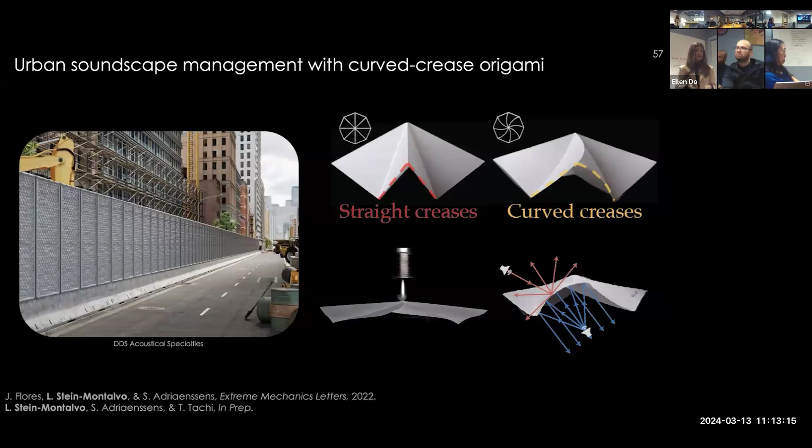The first task, probably at centimeter scale in experiments, is to study how we can shape sound waves based on panel curvature for different origami folds. Then in a parallel thrust, can we make these curved crease origami structures at the meter scale so that they're stable against wind and gravity loads? Those are two parallel thrusts on this work as a first step.

I'd like to take this a step further and think about multiple acoustic lens elements based on curved crease origami. We could have several standalone structures for finer control of the soundscape. And then we could think about tessellating these things so that you can impact sound through local deformation of each individual unit, or through global deformations of the entire structure. So kind of an acoustic metamaterial type design.

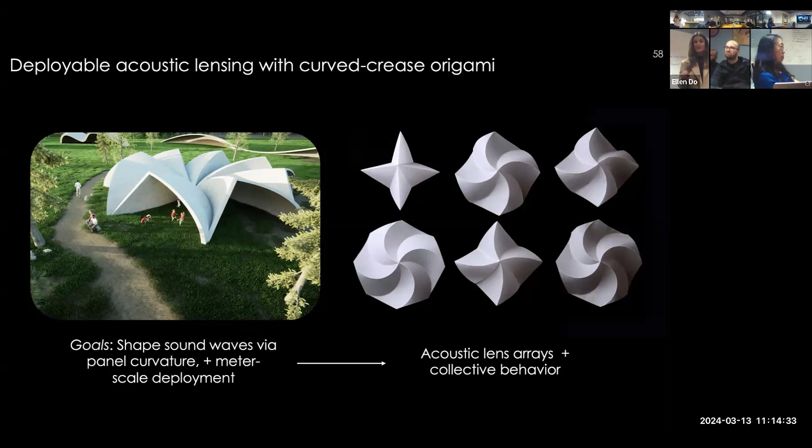Here, I think there are folks working on sound and music, and we could probably come up with some fun, unexpected collaborations. On this last topic, I think this would be a great place to collaborate with people working on sensing and robotics in this institute. And as a general statement, I think this kind of human architecture interaction compares really well to human robot or human computer interaction. So there are also a lot of fun avenues we can go with that.

The last thing I'll talk about is that I really prioritize and integrate this idea of inviting science into my research, and a bunch of my research is inspired by art forms. I think especially these meter scale, in your face interactive demonstrators are a great way to engage people who might not otherwise be interested in engineering. So I proposed several of these meter scale interactive demonstrators for my future research, and I'm excited to get working on these kinds of things.

So with that, I'm going to leave you with a big picture summary of my research spanning from these fundamental mechanics of shapeshifting to using shapeshifting for things like shaping wind and light. And then in the future, I think there's really a lot more we can do to play with these surrounding physics and impact urban designs. I'm happy to take any questions. Thanks for your time.

I have a question. Sorry.

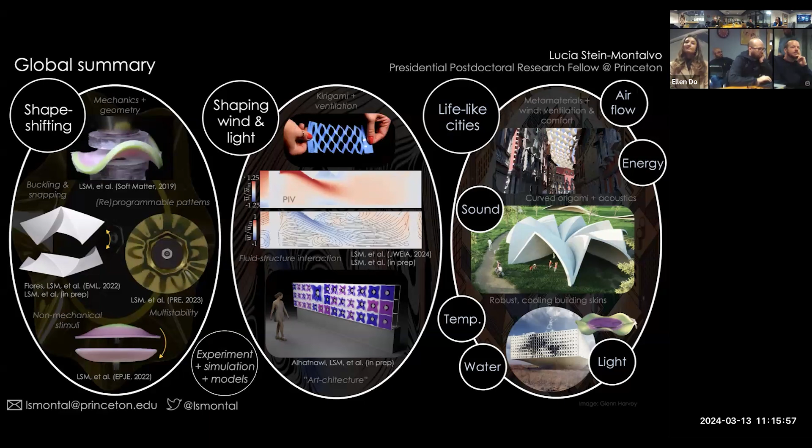So as far as the first fascinating work, really cool. Thank you. How much of your work extends into the sort of capturability and reusability of these types of materials, as far as how they extend from their implementation and then sort of repurposing or recycling? That's a really good question.

I think a lot. Thinking about sustainable materials is certainly at the forefront, as is thinking about frugal design as much as we can. As an example, for the kirigami shading and ventilation, I could imagine just giving someone a template, like cut up your bed sheet and do this and use it. I think it factors into the idea behind this sound project in the future. Very much. The idea would be that these are reconfigurable, you can move them around. It's like a temporary meeting pod within an office, or it's bigger and it's outside.

And so that's definitely a consideration for that project in particular. I do think, in both that and then the airflow, kind of taming wind speeds - these are really ways to reduce the amount of materials we're using, like flexibility leads to robustness. So I do think it's kind of a reduction standpoint, and for reusability, I would like to think that a lot of these things could be reconfigurable and you could move them around as you like.

Amazing talk, thank you. I was wondering about the sort of adaptability for some of these materials, like the kirigami and others. When you think about the future of implementing these on a large scale in cities, do you lean towards software manipulability for the materials, or the materials themselves reacting?

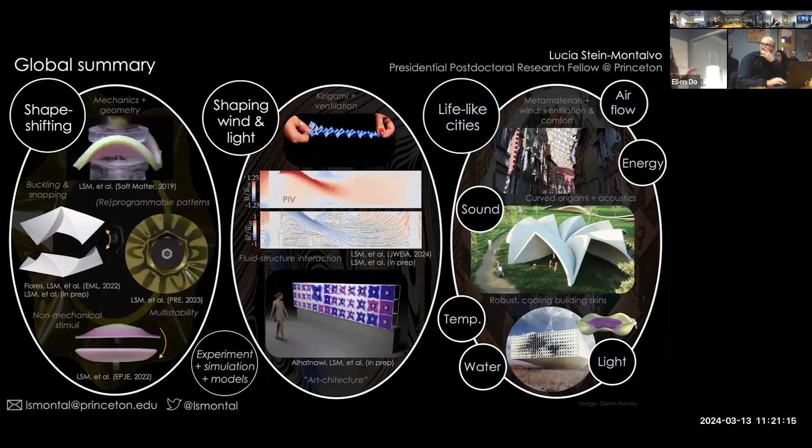Have you looked into the ways findings translate? That's an excellent question. The Reynolds number similarity ensures these flows will be similar, but you're right that we can't assume that for mechanics in all cases. Kirigami deformations have been shown to be scalable, so I think that's partly why I go to that first - it's a great candidate for scaling up. But at these scales we often don't need to deal with gravity, and we certainly don't need to deal with wind loads, so a lot of the materials, stability and actuation questions are open. That's something we're starting to get at with this exhibition, but the structures themselves aren't bigger yet - that's something I'm really thinking about going forward, we need to make these things at larger scales to be sure it actually works.

The reason I also ask is you began by talking about urbanization and the need for this to be at scale. But then, even in today's world, the most compelling shape-changing architecture I see are either skyscrapers or sports stadiums.

And I think part of that is construction methods that are required for that are far too expensive and unsustained today. To what extent do you think that these ideas can fit into existing patterns of construction, and how much do you think needs to be changed?

I think some of the building skin ideas are more exploratory and proof of concept. But then there are others, like the large origami and kirigami stuff, where we can really retrofit spaces with them. Is that the largest scale thing you've built based on your research at the moment? Yeah, the installation. Cool, thank you so much.

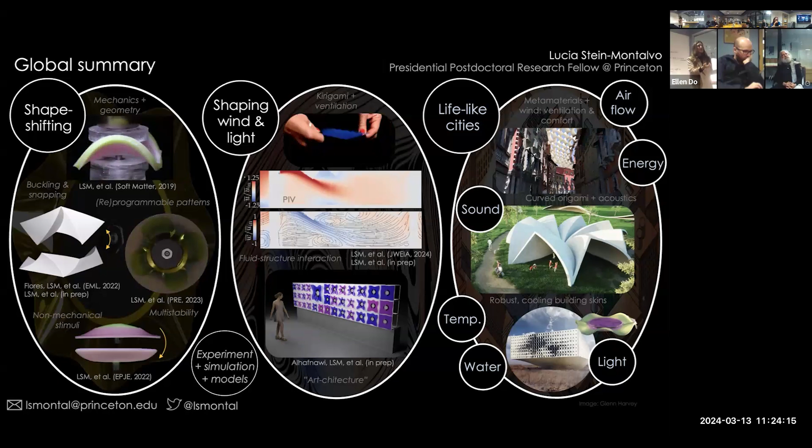When would it not be appropriate? I think a lot of these designs are very local microclimate dependent. Kirigami, these things, I think are more appropriate for arid regions than wet ones, for example in a streetery - something like that. So there's a lot of local climate dependencies. In addition, we need to think about whether this is somewhere we want more wind or less wind. Things like that are considerations.

And then it comes back to the cost and sustainability metrics - does the total benefit outweigh the cost? I'm not an economics person by any means, but I think in the far distant future that would be an interesting collaboration area for me - if we're doing all these interventions for building, is that actually better than some other possible interventions?

Yeah, and it's going to be one of those rambling questions where I'm not sure what the question is, but with full respect to the work, it feels like the spaces from where you're working and your dreams of implementation have a pretty large distance in terms of things that need to be grown. When we're going from one scale to the next, there's a lot of - you're entering the open space of possibilities, which is kind of intense.

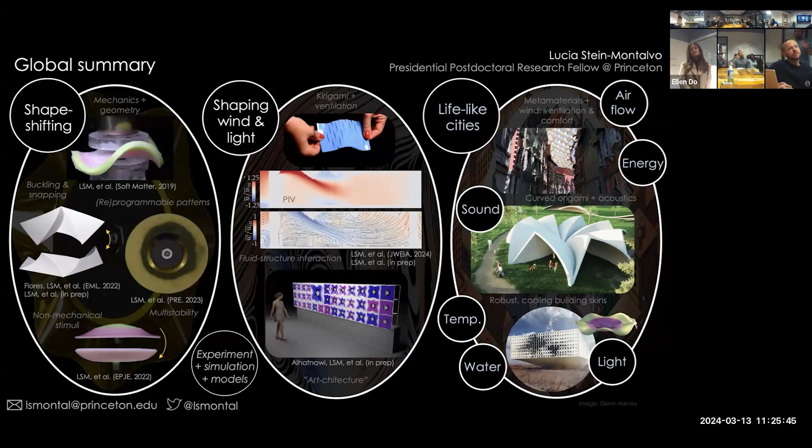I'm wondering what you feel is the bridge between, or what you feel the tangible things are that might come up out of a research institute like this. Before we can get to taking something at this scale and putting it on an entire building surface or an urban environment, what do you feel are the tangible - and I think the installation in the center is a really good example - but other places where you maybe envision that as something built inside the community of people making and creating here at ATLAS?

Yeah, I totally agree with you, and it's a great question. I'm really thinking along these lines of this kind of intermediate scale - let's go back one slide.

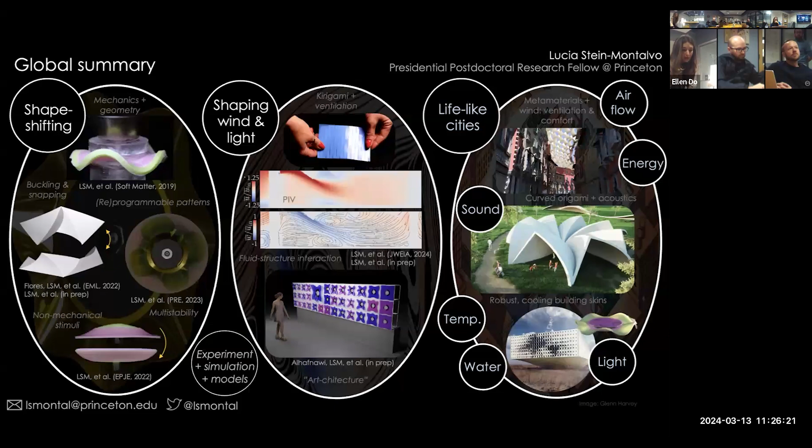My idea is we can start at the centimeter scale on a lot of these things and understand that, so we're not just building a bunch of big things and tearing them down. Understand something at this scale. Then I think it's going to be an iterative construction process where we're building these things up and seeing what works, using theory and simulations whenever we can, so we're not so wasteful. I'm really targeting this intermediate scale as a demonstrator that you can go a bit bigger than this.

I think these would be appropriate for demonstrators in an indoor exhibition space, but also outdoor on campus. If it's like a wall with hydroactive panels, this can be outside and we can actually see what happens in the real environment, with wind loads and things like that.

For me, I think a lot of this intermediate work uses experiments primarily, but also simulations and theory. I think all three ingredients are important, but especially on this upscaling part of things, experiments are really important for me.

I see things like this as a really interesting potential place where students become a part of it. We have a lot of students here who are really interested in actual physical, tangible builds. So it's an interesting bridge to think about.

I definitely agree. In my experience a lot of students are really interested in this, and depending on the project, it could be appropriate for students ranging from undergrads through PhD and postdocs who are interested in, 'this is my project, I'm going to build a big thing and it's going to work' - we'll see how it goes.